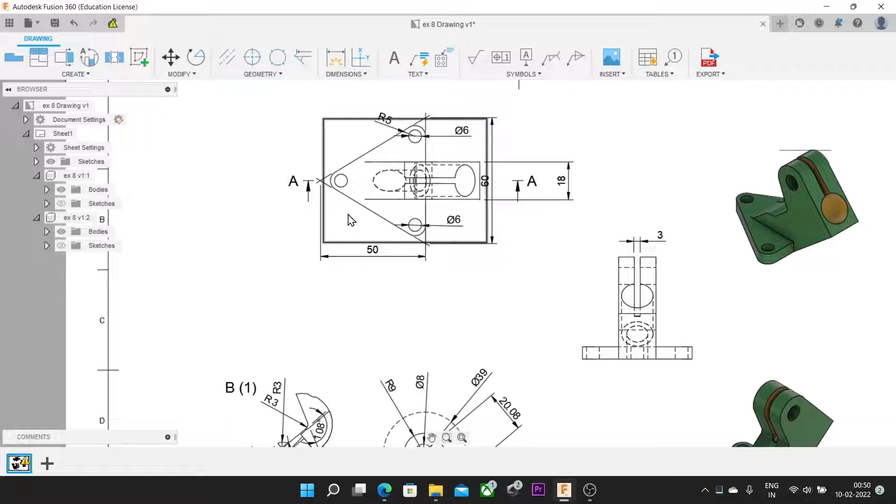Today we are designing this model. It is very simple and easy to construct in Fusion 360. In this model we are using extrude cut, extrude feature, and some hole type features like a counterbore hole, which we'll see in this model.

Let's start from its drafting. Now I am taking the top plane for designing the triangle of 50 by 60. For that I am taking a line of 50 mm, which will be the construction line, and making one half triangle. Let's see.

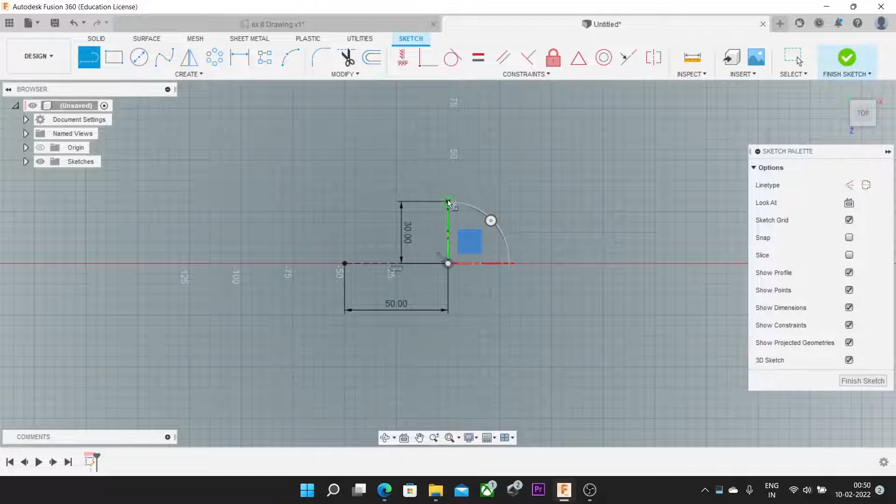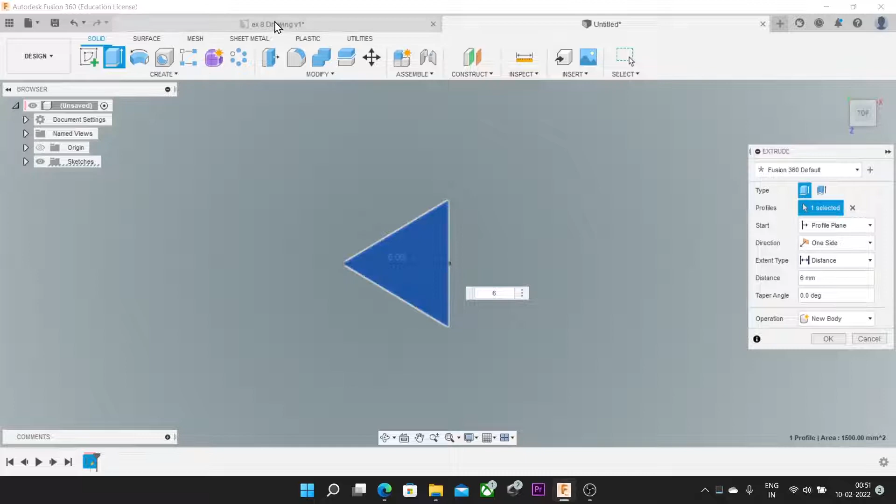Like this, our triangle has been completed. Now we are using the extrude feature to extrude this sketch up to 6 mm as per the diagram. As 6 mm shown in the diagram, the extrude feature has been conducted of 6 mm.

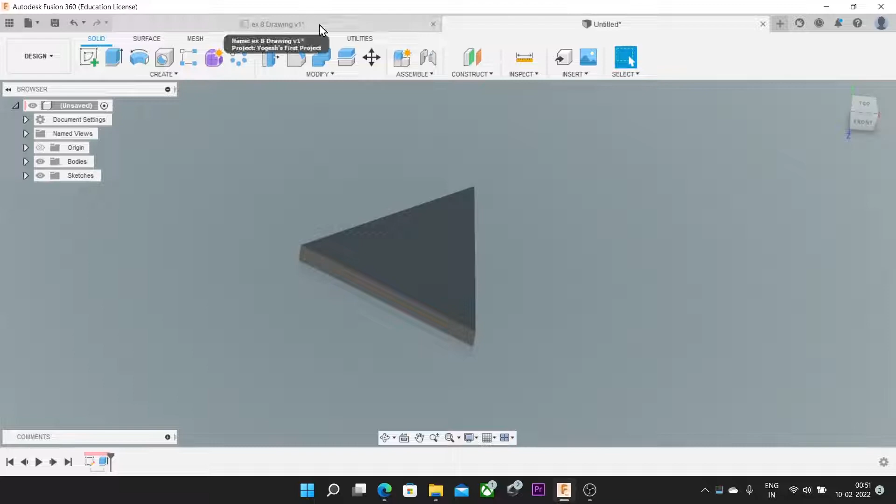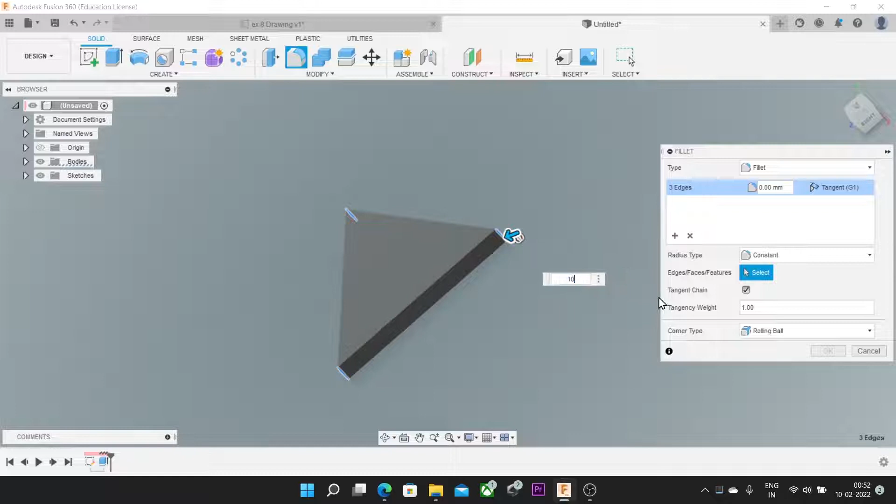Now we are using the fillet feature to fillet the edges, giving a 5 mm radius fillet. So let's start - I am selecting fillet from modify, then selecting all three edges where I want to give the fillet. After that I am giving the dimension of 5 mm. Then OK.

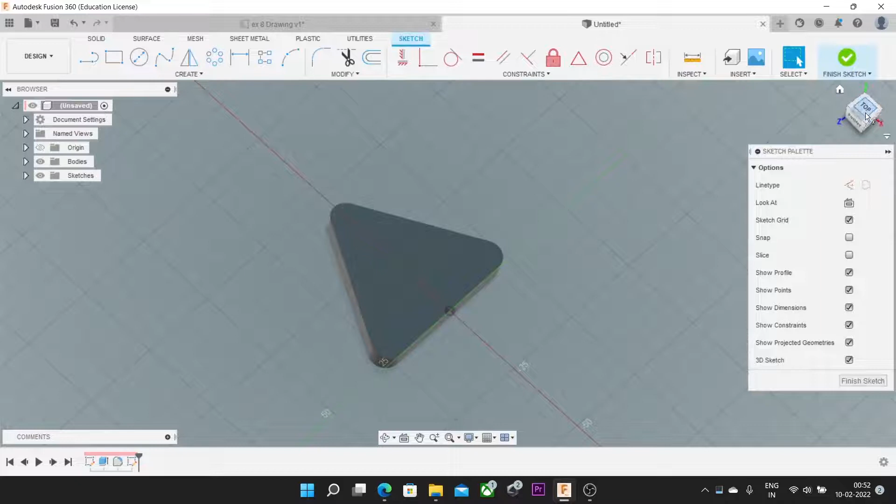After that I want to make 3 holes over this plane, so I am using the top face as a plane. Then for finding the 3 points I am using the line command with construction lines, selecting the 3 points and connecting all of them like this. By connecting all the 3 lines, we get the 3 points which we used for the further holes.

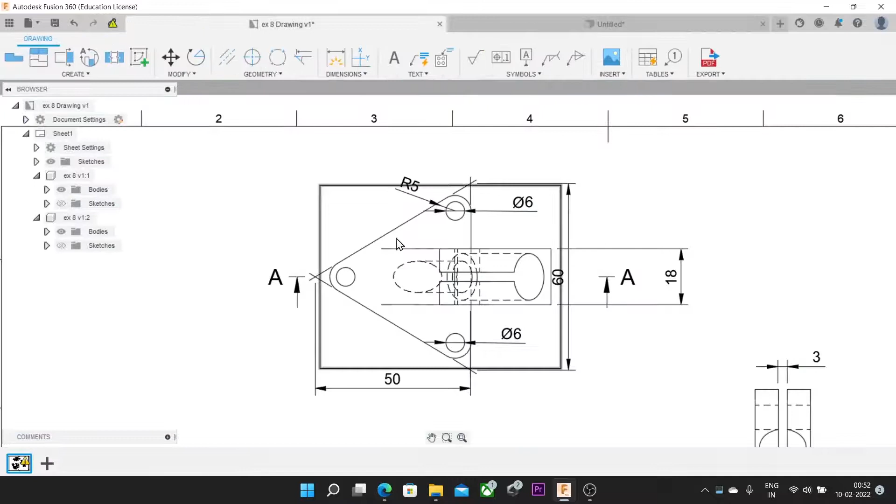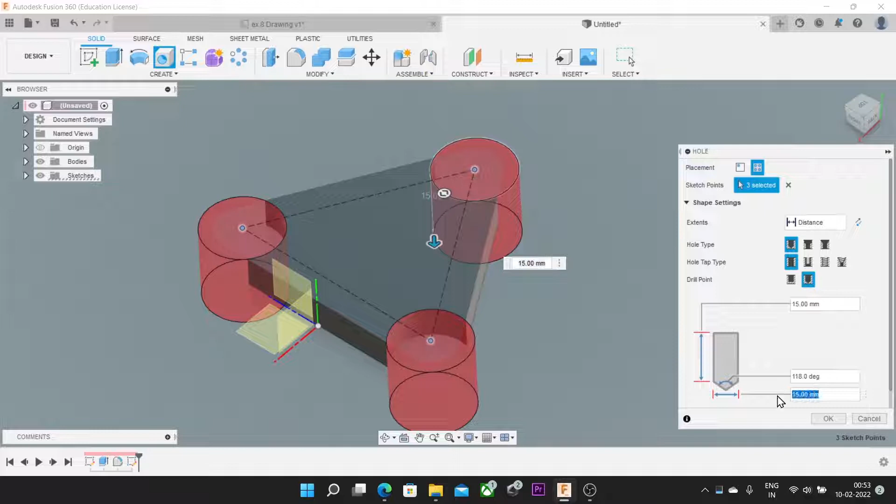Now I'm using the hole feature from the create bar. We are providing here the 6 mm hole, just selecting all 3 points. Our hole is a simple hole, so I just provide the diameter of 6 mm. And our hole is a throughout hole, so it doesn't require the length. Like this, now our hole has been completed.

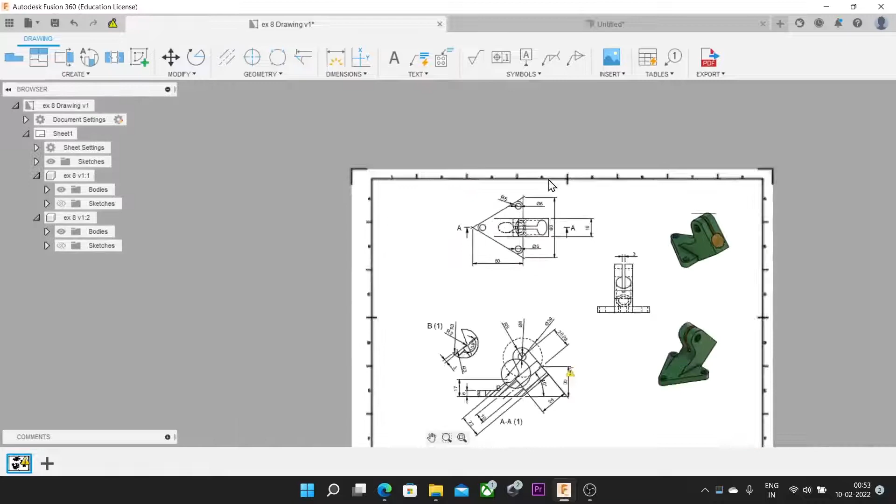The one part of this design has been completed. For the next part, it means the inclined part, we are using this section view of the top. Let's draw this section view or inclined view by using one plane which is parallel to the front plane - we just use the front plane. XY is nothing but our front plane.

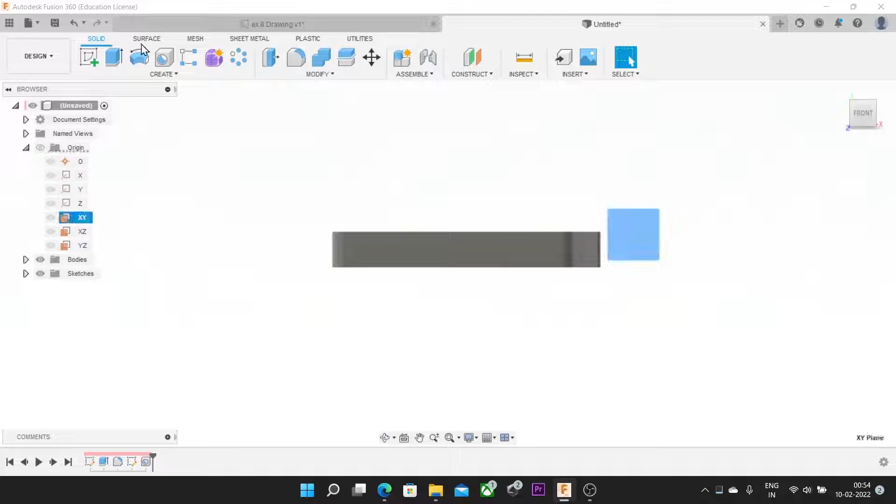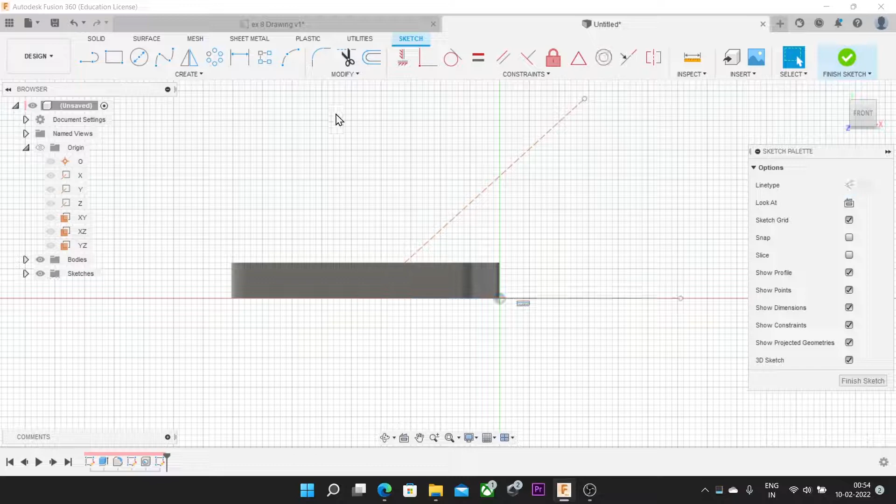I am sketching over it and making the whole sketch over here. Just I create one center line and the reference line and give them the angle of 40 degrees.

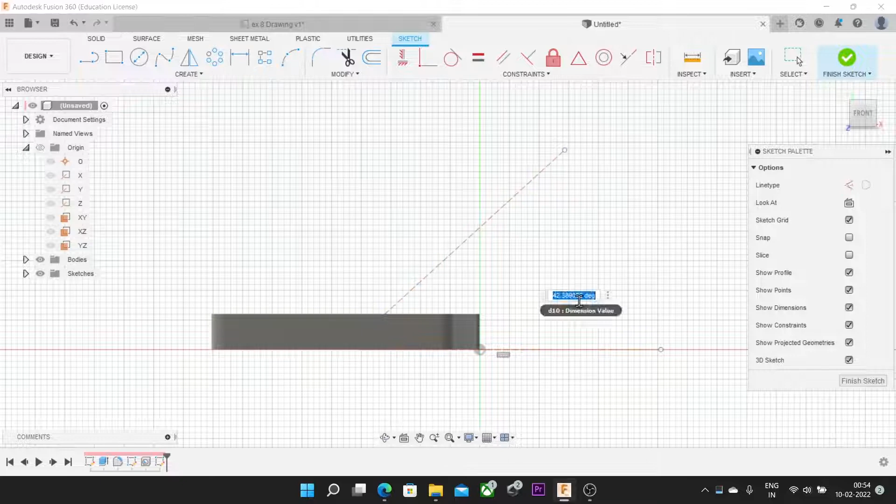Then I am doing the offset to this line of 11 mm. As we see in the diagram, there are two lines of 11 mm which are offset to our center line, like this.

Then I am constructing or coinciding this line with this point, or reference point, or the origin, like here. And after that I am once again using the coincident feature.

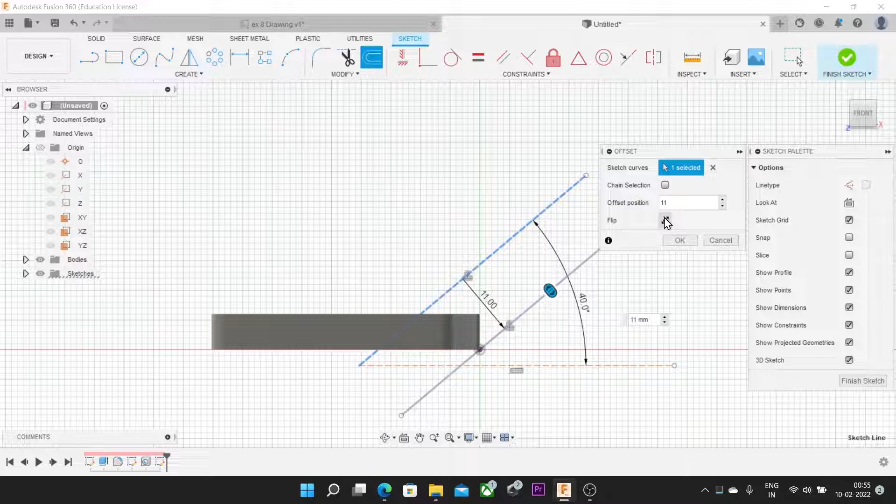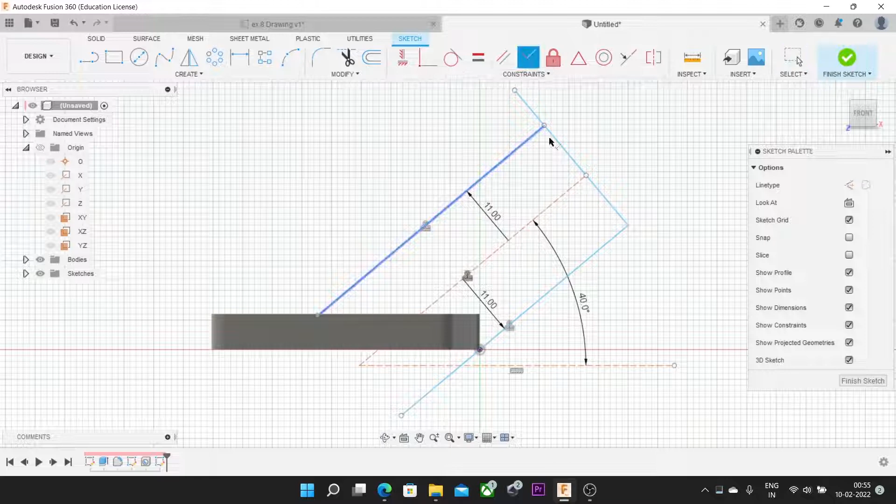Just I make this first, the second offset line, and connect that line with one perpendicular line which is perpendicular to our center line.

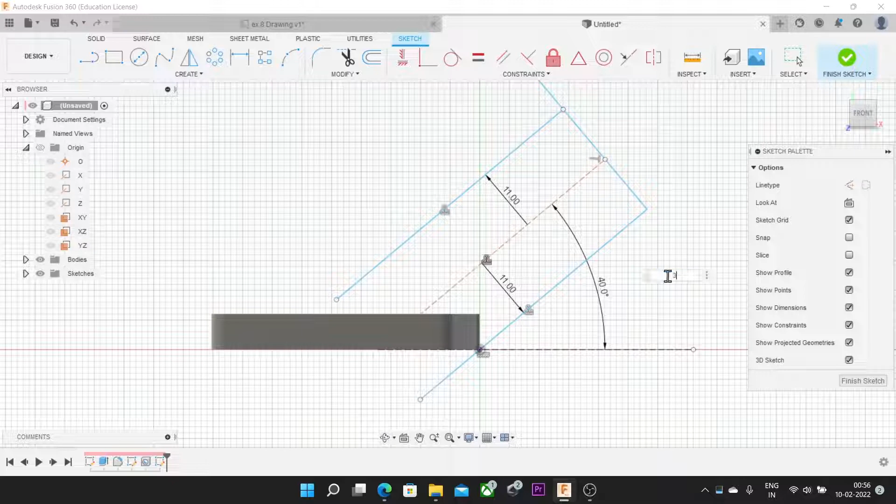And providing the length of 30 mm as shown in the figure. Like here, the 30 mm is the length of this center axis toward the origin.

Then I just create one circle of 18 mm radius, 18 mm diameter. Then just give the distance from the center, which is 20.

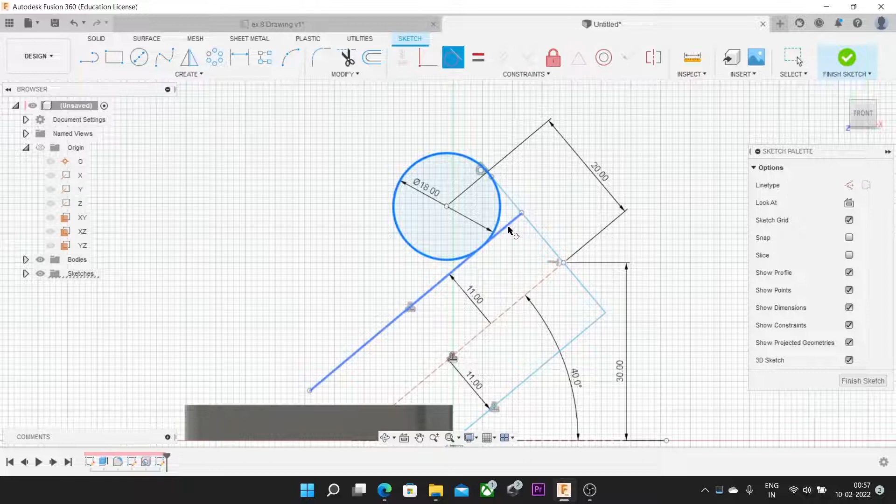Then I use the tangent constraint to tangent both lines, and use once again the coincident feature to coincide the line and the point.

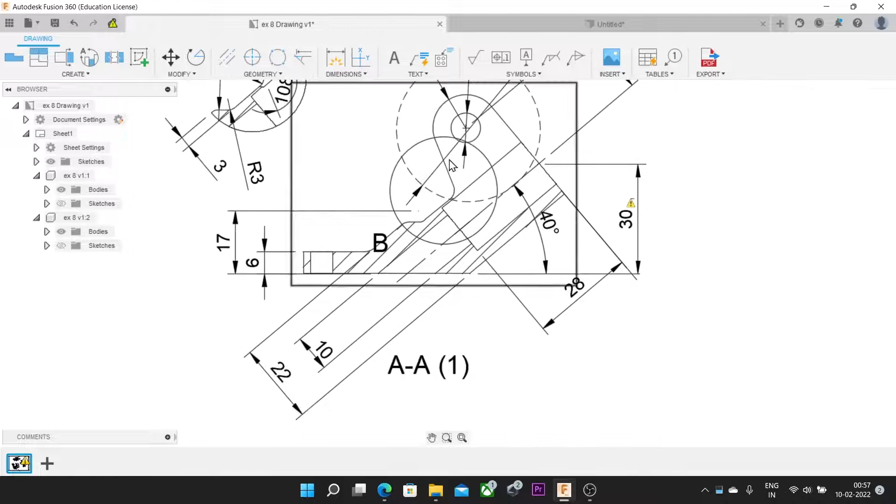For another section, I am using one inclined line at angle of 108. There are also some offset lines of 3 mm, which I am seeing in the figure. Let's see how.

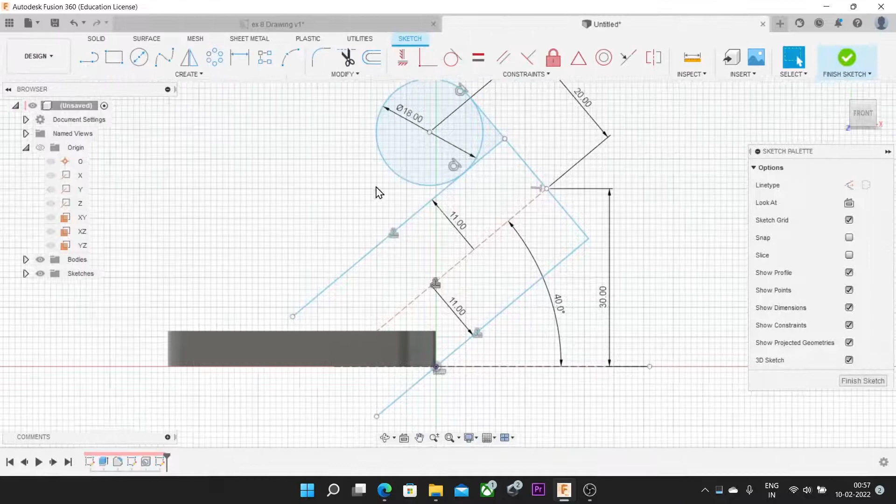Just I am making one offset line. They are showing some error, so I want to delete that offset symbol. Now I can easily use the offset feature, just offset about 3 mm like this.

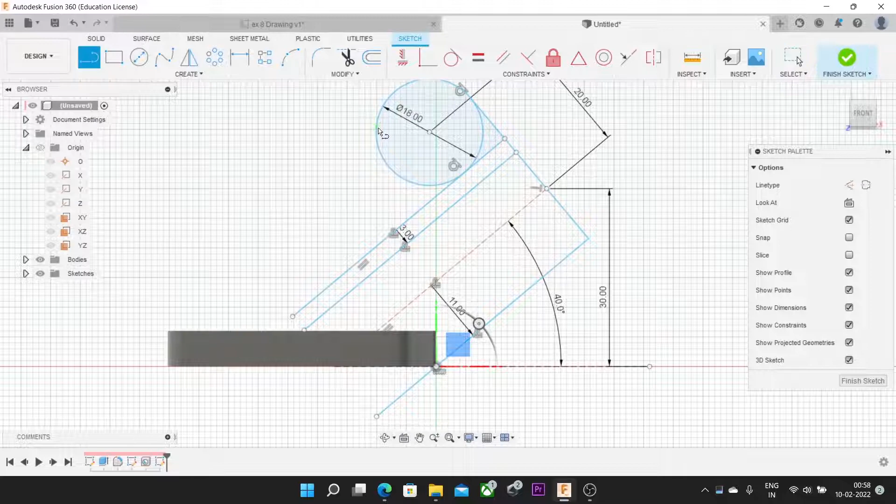Then I am connecting the 3 mm line with the circle by use of tangency. Just provide the angle of 108, and give some fillet of radius 3 mm. All the radii are 3 mm.

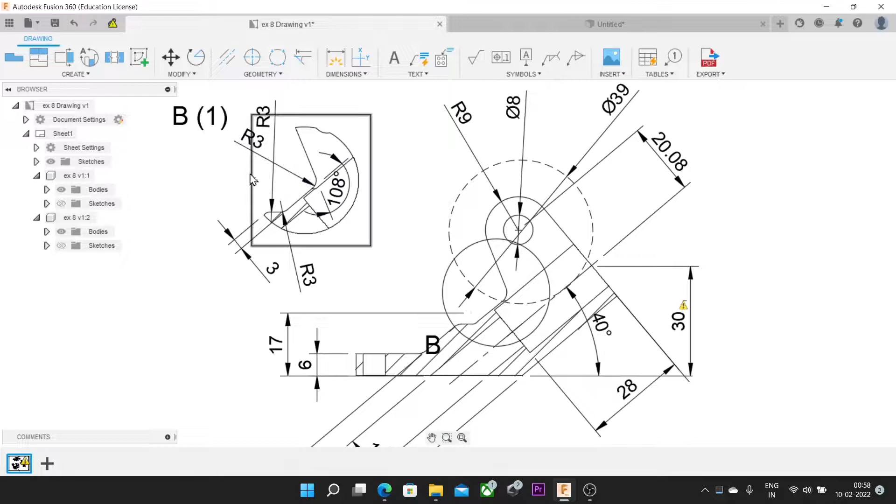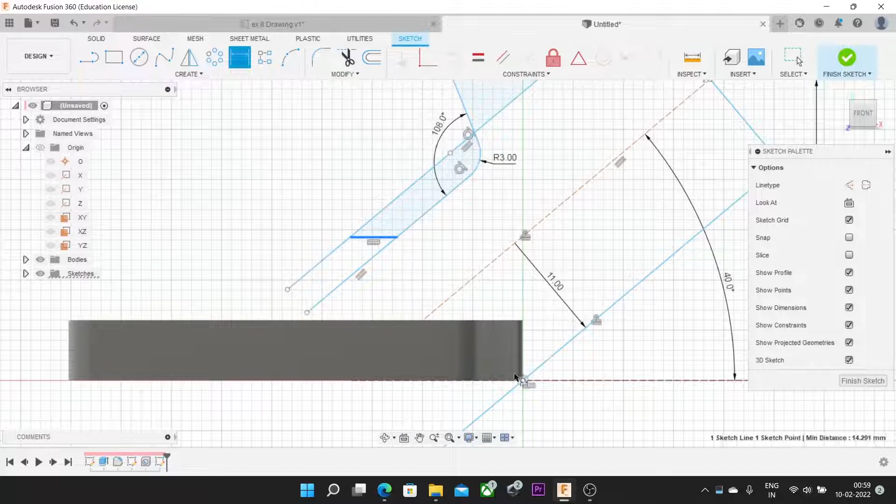For making that line, I am using one straight line which connects both two offset lines like this, and provide some dimensions from the origin like here. The distance here is 17 mm as given in the figure, so I use 17 mm here.

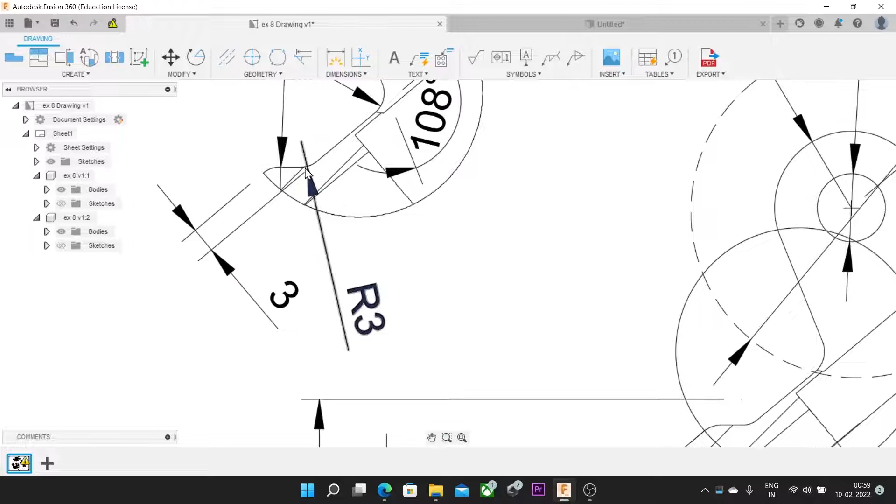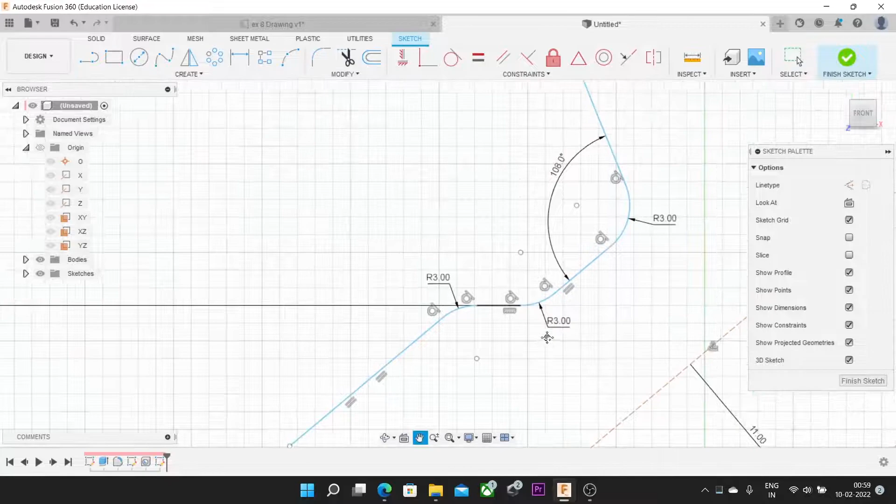Then I give two fillets of radius 3 mm. Just I use the extend feature to extend that line up to the base point or the base.

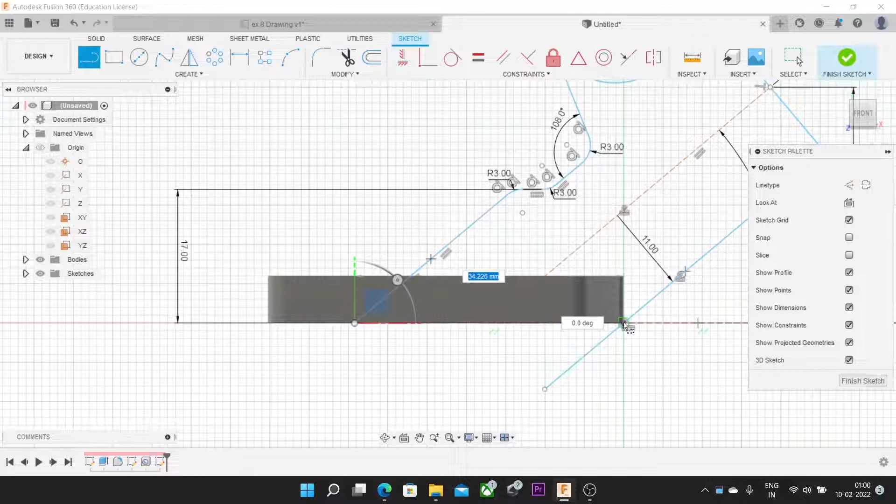For closing this sketch, I am using the line and connect the 2 points, like from origin and that line. Now our sketch is closed. I trim the unrequired part here and this.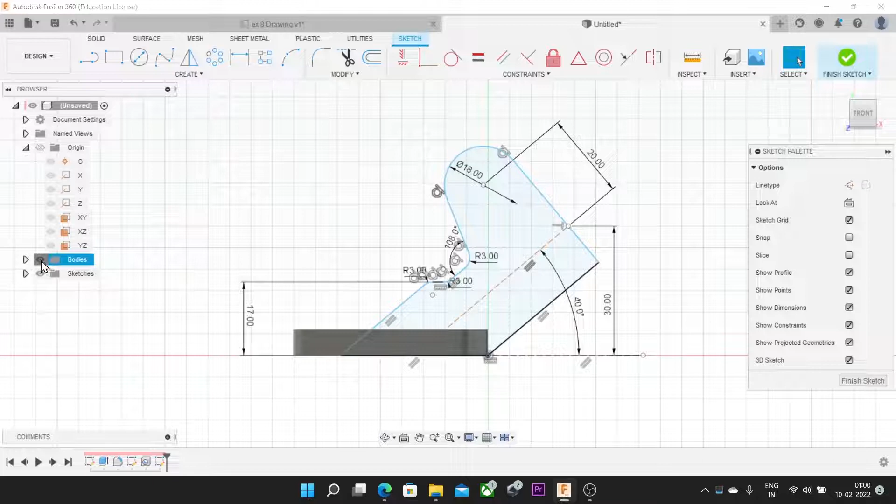Now our sketch is unconstrained. To constrain it, I hide the body part. Now can I easily see the body part?

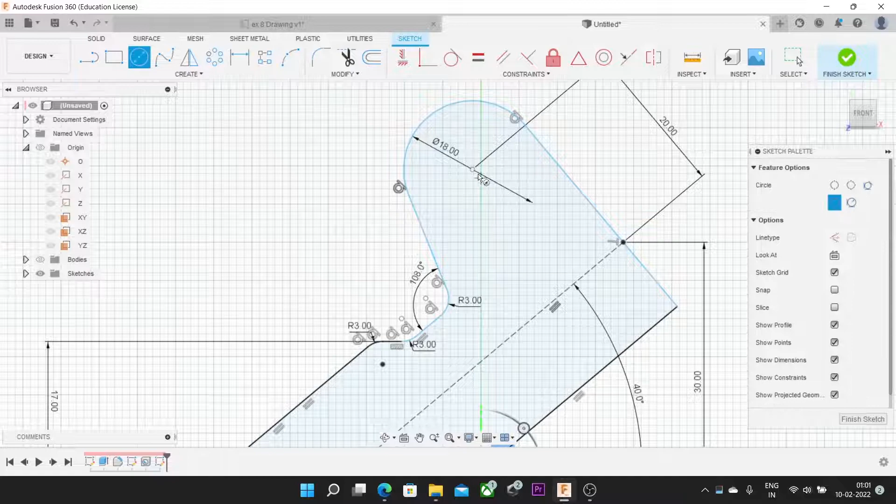I'm making one circle of 8 mm radius, sorry, 8 mm diameter, diameter 8 mm.

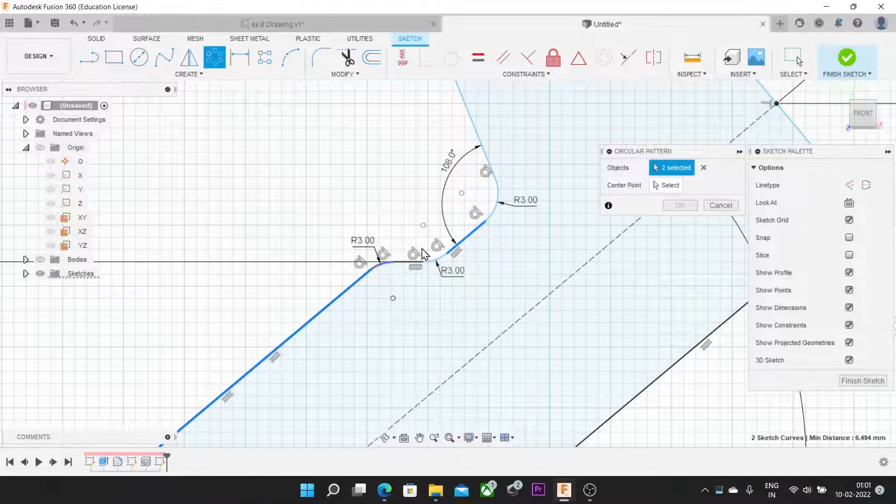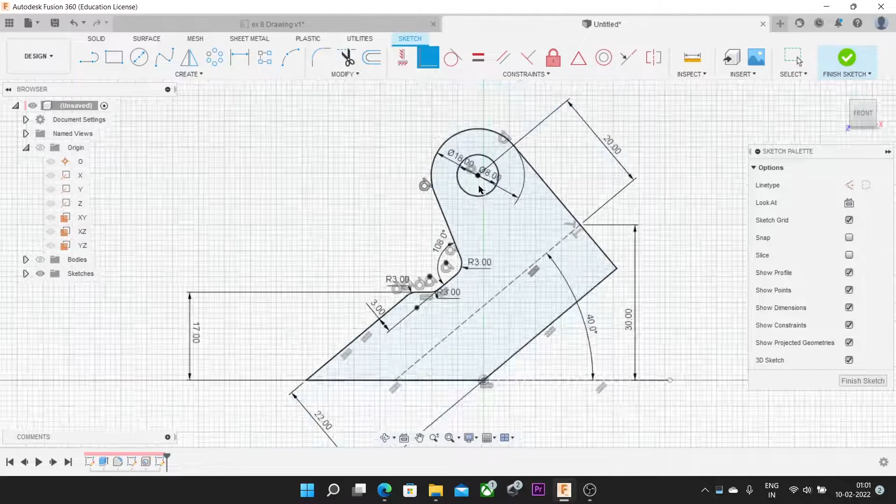Now you can constrain as per your requirement or as per your idea. Like this, our diagram is constrained. Just finish the sketch and unhide the body.

After that, I use the extrude feature. I want to extrude this part up to 18 mm. Just go to the extrude and select the figure.

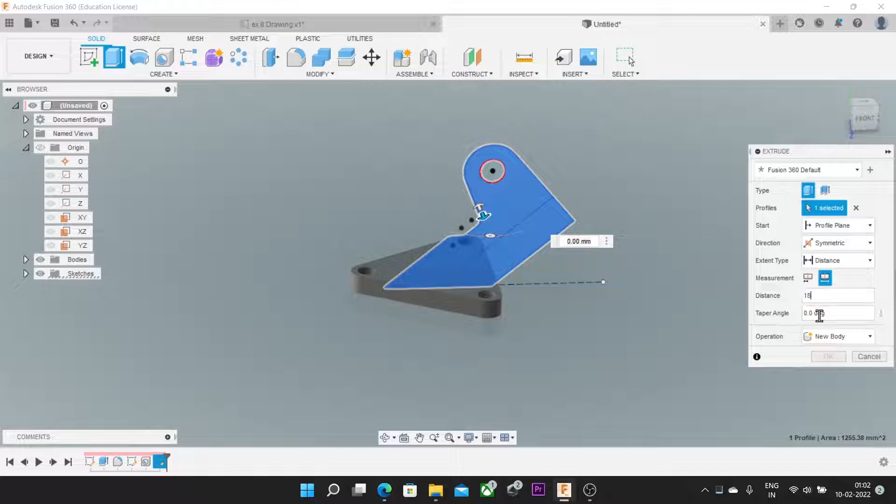And the direction will be symmetric, and we are using the measurement here, the whole length. The distance will be 18 mm, and the operation will be join. And okay. Like this, our inclined part has been created.

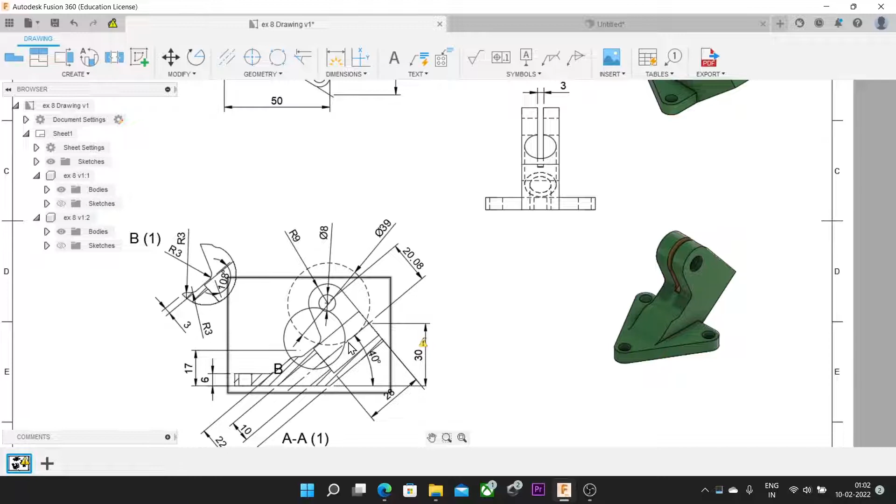Two things are remaining: one hole and the second is the slot. For making the hole, which is the counterbore hole, its center is nothing but the center of that second sketch diagram.

So I am using sketch 3 and make it visible. I want this point, so I create one plane over this section and then project that point. Create, project, and select the point which I want to project. Okay, like this.

For providing those, I just unhide the sketch. So I hide the sketch and then create the hole point. Our hole is the counterbore hole. The hole type is counterbore.

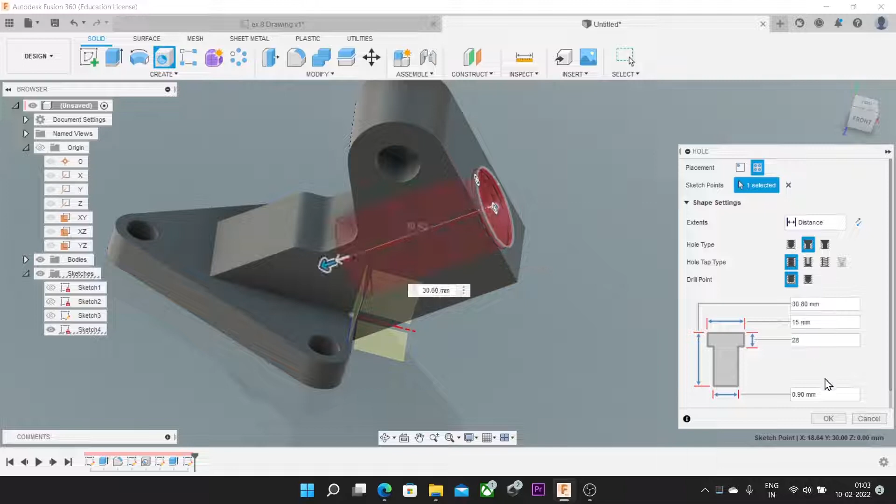And then I want the upper diameter and the lower diameter. The upper diameter is 15 and the lower diameter, the distance of the counter is 28 mm, and the lower diameter is 6 mm, like this.

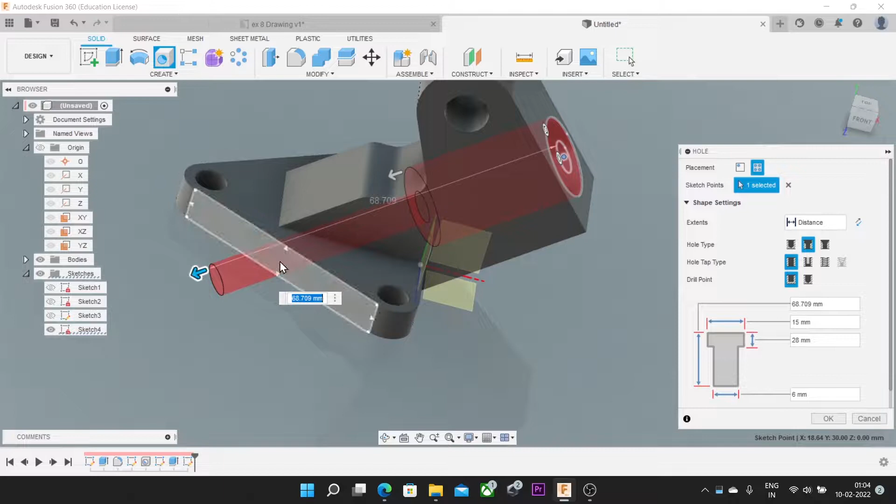The total length of this hole is not provided, so I just extend this line over here, which simply means I want my hole to be a throughout hole. Like this, our hole has been created.

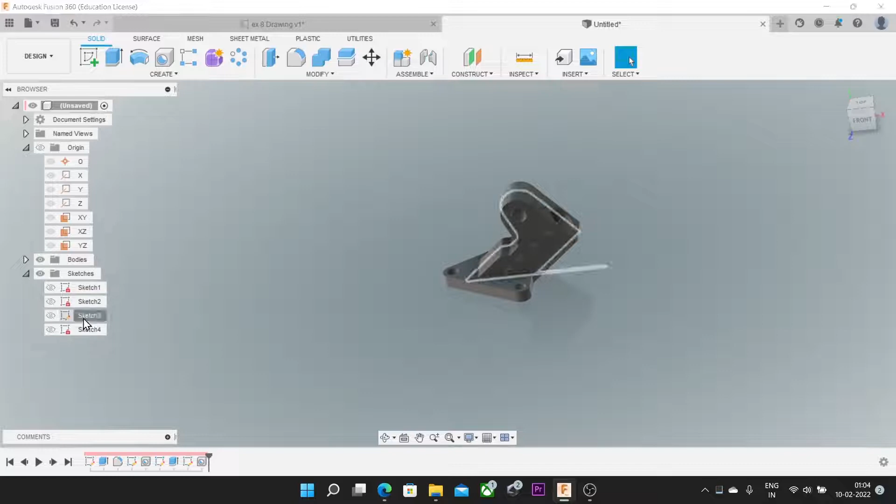The only thing remaining is the slot. For that slot, I am using sketch 3 once again. Just double click on the sketch and we can use it easily. I am providing the circle of 39 here. Just make the sketch visible.

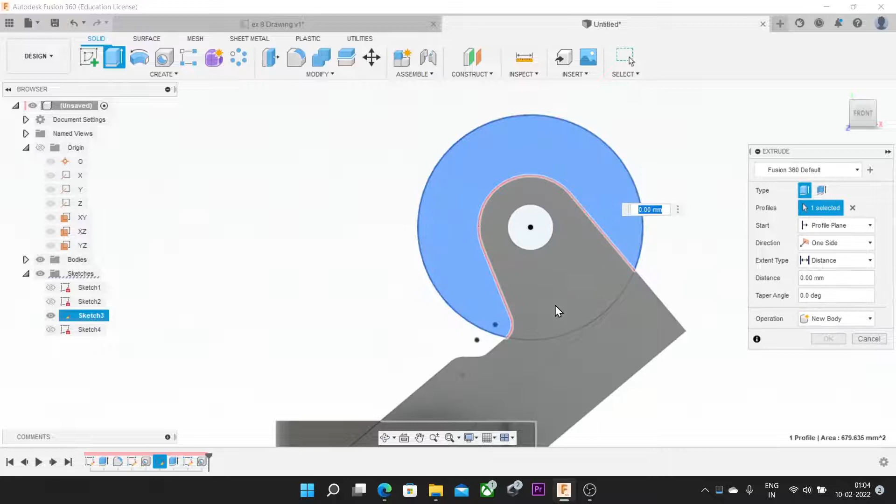Now I can use this circle for the slot. The circle has been selected, and we are providing the direction here, symmetric. The measurement will be the all length, and the distance here is 3 mm, and the operation will be cut, and then okay. Like this, our slot has been created.

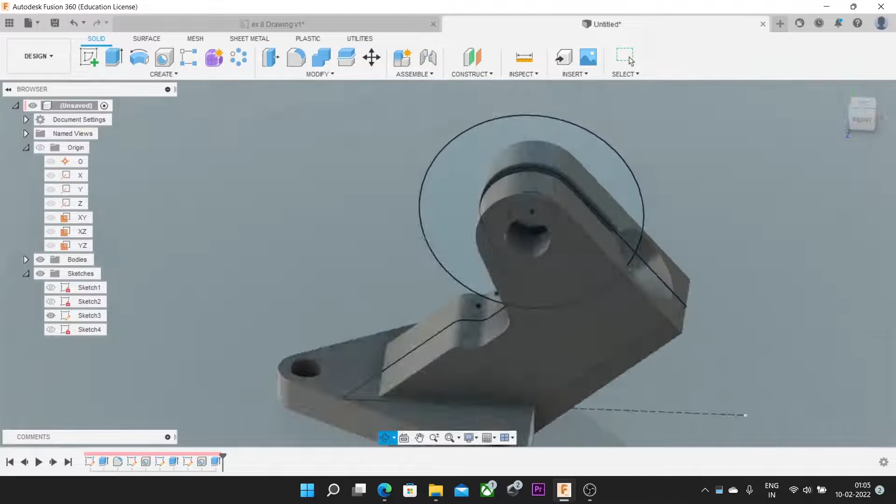For the finishing, you can provide the fillet. I am providing the fillet here of 5 mm, like here, and okay, and here also the fillet of 2 mm, like this.

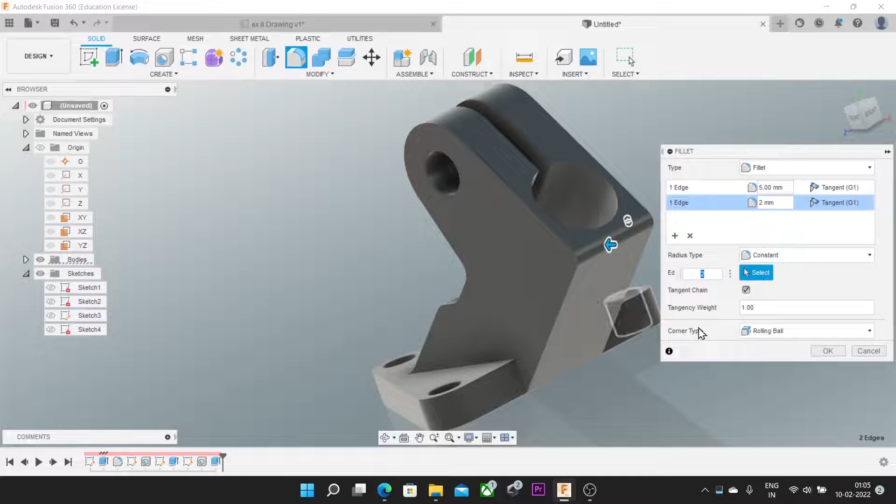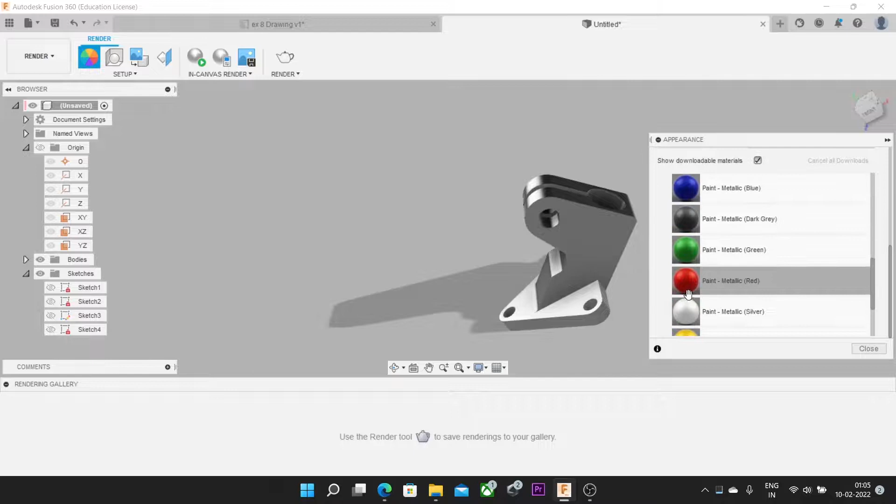For the rendering, you can give some color or paint. I'm using here the metallic paint. I'm giving the red color here, like this. You can give any color as per your goal.

Now our sketch is completed, and I hope you like this video.